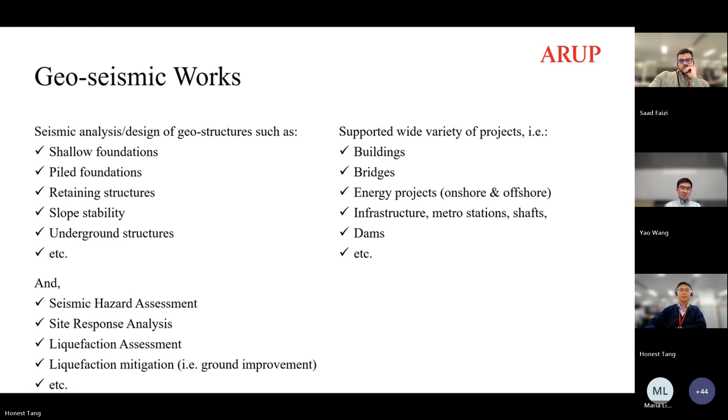For the design, we need to follow or meet the requirements stated in the design guidelines. In Asia, some regions have their own standard, like Japan, Indonesia, and the Philippines. They have their own design guidelines and requirements, especially to satisfy regional practice and concerns. For regions without local design guidelines for seismic design, most of them follow international design guidelines like ASCE from the USA or Eurocode.

But in Hong Kong now, we do not have a seismic code. As Maria mentioned, ARUP is working with the Hong Kong government to draft Hong Kong's first seismic design guideline. The process is still undergoing, and hopefully we can get it done so we can have a more comprehensive design for Hong Kong structures and other engineering designs.

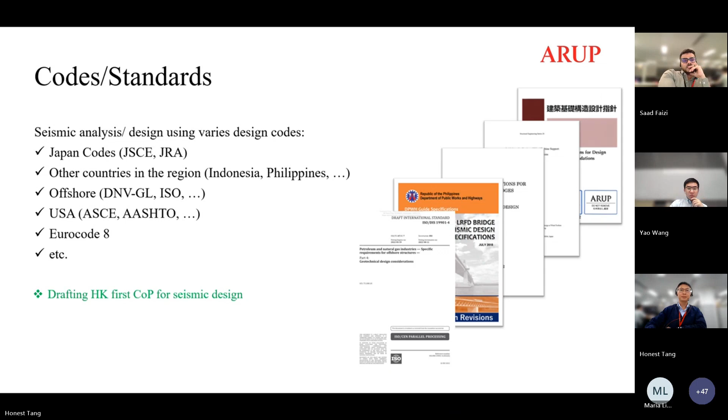Before doing the seismic design, we need to check the seismic hazard. This is an experiment we did recently - we did the PSHA, probabilistic seismic hazard assessment, for one of the projects in Japan, and also Korea, as well as the Philippines. So this is an example. Through this study, we try to work out a more regional-specific seismic background spectrum.

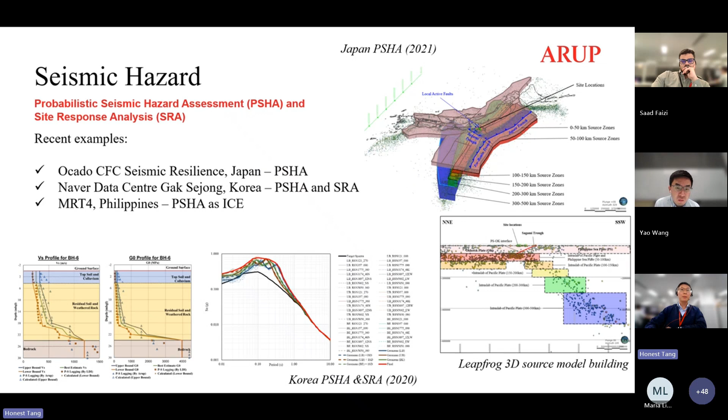Energy, especially offshore wind, is an emerging business or market in the past few years. I'm involved in a couple of them, covering Hong Kong and South Korea. Currently, most of them are from Japan because the government is pushing renewable energy quite hard - they put a lot of effort into this business or market.

So this is maybe an old map - you can see the dots, the blue dots showing the offshore wind site locations. I believe now along the Japanese shoreline there are already lots of projects there.

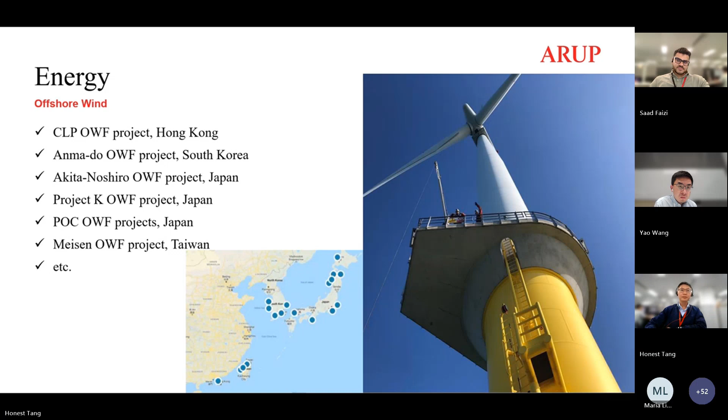So what we do for our offshore wind project - we focus on the foundation design, which we can split into two parts. First, we need to do the seismic hazard assessment. As I mentioned earlier, we need to carry out the liquefaction assessment to identify any liquefaction risk. After that, we need to do the site response analysis to check how the site responds under certain earthquakes.

Then we move to the foundation design. We need to do the dynamic soil structure interaction, the DSSI. We have two methods to do this. For preliminary studies, like the concept design stage, we normally use pseudostatic analysis to check the dynamic force. For detailed design, or when the client wants more accurate results or optimization design for their structure, we normally carry out time history analysis using advanced analytical software like LS-DYNA.

Here is some example to show you what they look like.

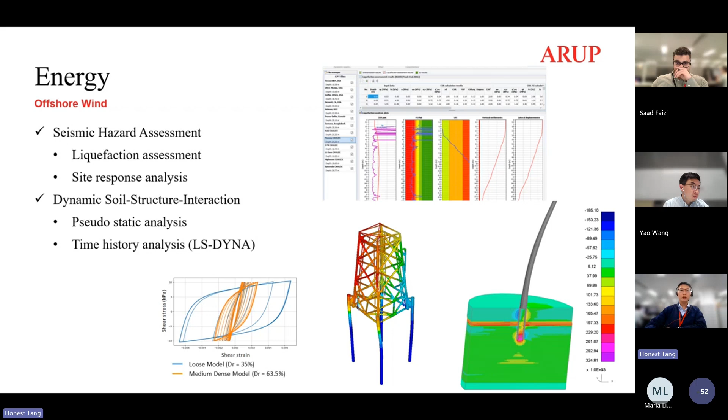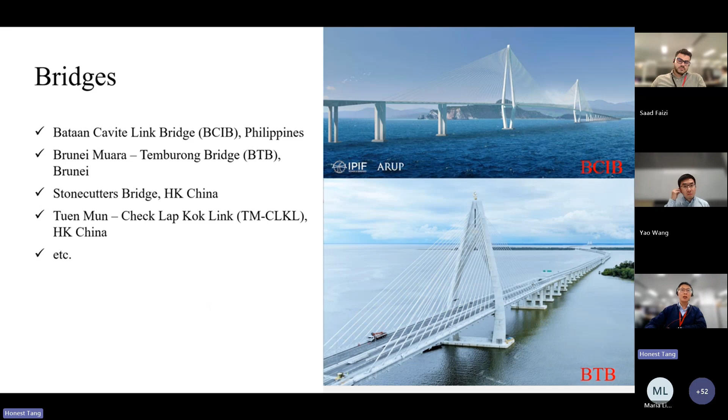Next, another major infrastructure project is building and bridge projects, covering different regions like the Philippines, Brunei, and also Hong Kong, China. We mainly focus on the foundation, similar to the offshore wind foundation - we also need to do the seismic hazard assessment as well as the DSSI to check the seismic impact to the structure.

The metro is also an important infrastructure, but it's slightly different because most of these metro stations are underground, so we need to do the dynamic soil load imposed on the underground structure. Regarding this kind of analysis, Saad will share his experience in more detail.

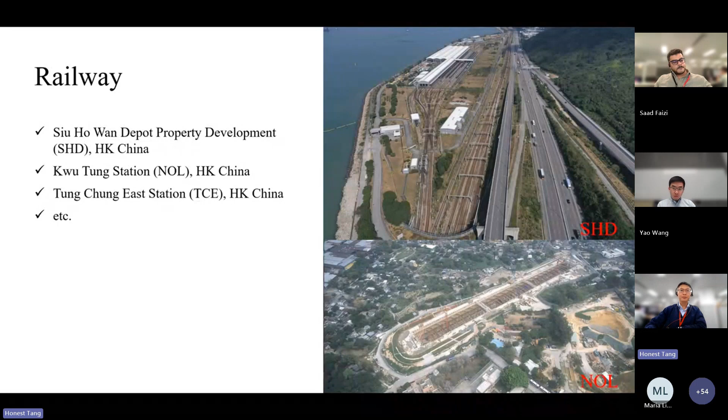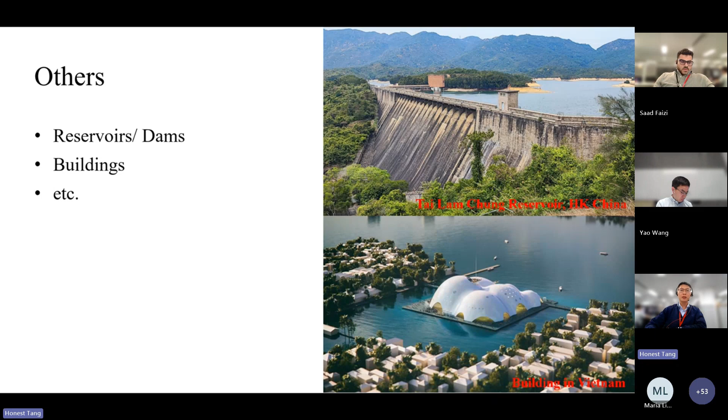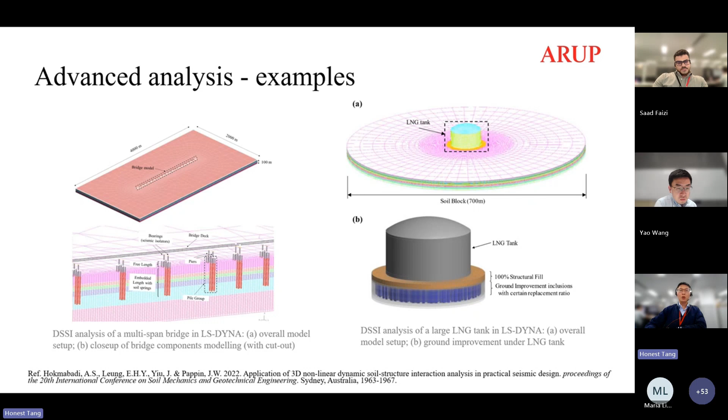We did this analysis using LS-DYNA. On the right-hand side, here is the LNG tank simulation to see the impact from the earthquake to the structure. We model the entire LNG tank and input the time history at the base to check it.

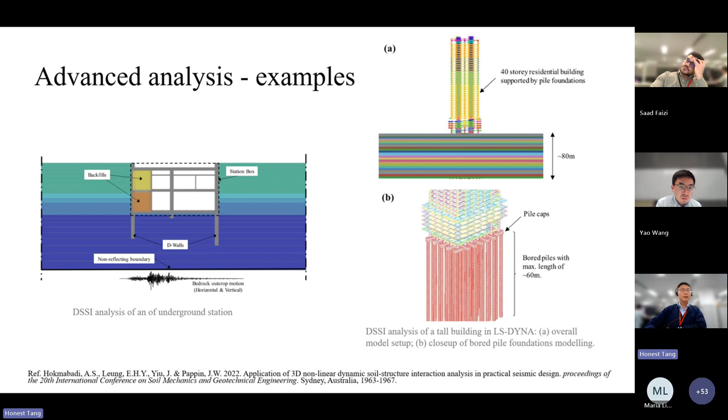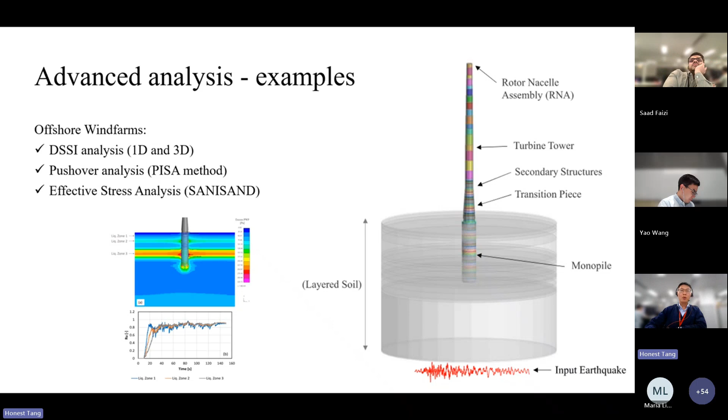So once instability happens, like liquefaction, the entire structure will collapse or overturn. That's a very high risk. So to precisely estimate the liquefaction potential, in the model we used an advanced soil model called SANISAND to check the pore water buildup and also the liquefaction risk.

Eventually, or luckily, all the measured vibration was within the limit. So the project went through well.

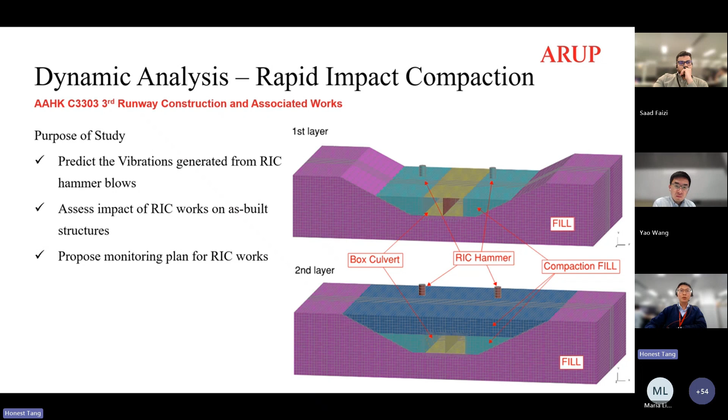So that's the end of my sharing, and I will pass the stage to Saad to share his experience.

Saad, please. Yeah, thank you so much, Honest. Quite insightful, quite interesting. Let me just quickly share my screen. Okay, you can see my screen now?

Yep. Okay, so hi everyone, my name is Saad Faizi. I'm a geotechnical engineer in Hong Kong. I'm actually sitting just besides Honest.

I currently sit in the geotechnics and energy team in ARUP Hong Kong, and I work mainly on offshore wind farms these days, handling both the foundation design and subsea cable installation for various wind farms in East Asia. But in addition to those offshore projects, I also work with the Hong Kong geo-seismic team on the seismic analysis and design for a diverse range of projects in different parts of the East Asia region.

So for my sharing in today's webinar, I thought it would be interesting to share one of our studies involving the seismic analysis of an underground station using two distinct and well-known numerical approaches, namely the pseudostatic and dynamic time history approaches. And I think Honest touched upon it in one of his slides briefly as well.

Let me just quickly take out my laser pointer. Okay, so this is a quick rundown of what we will discuss in this sharing. I'll try to be brief, and I'll try to stay within my time limit.

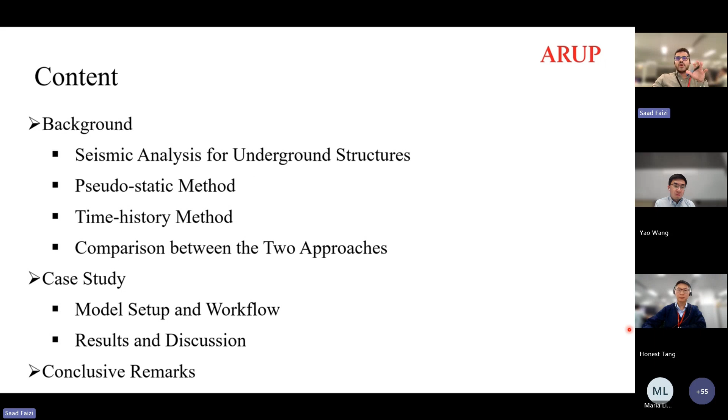So in case I'm running out of time, I might actually skim through a few of the results, but rest assured, you can find the details in one of our papers, and I'll talk more about it.

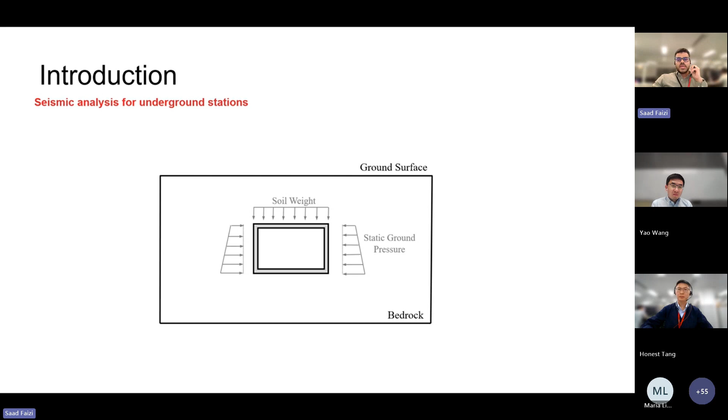So let's first begin with a quick introduction and get ourselves up to speed with the seismic analysis for underground structures. Typically, this is what you would see - the loads that you would expect acting on an underground structure like this underground box structure. But when we consider the action of an earthquake, you can expect that there would be seismic impact, right?

And the seismic behavior of underground structures, understandably, is quite different from your above-ground structures. And that's primarily because of the fact that you can imagine the underground structures are constrained by the ground itself, so they're not allowed to vibrate freely.

The other reason could be that the geometry itself is such that you would expect the length to be much longer than the cross-section dimension. So there are key distinct differences in terms of how we assess the seismic behavior of an underground structure.

For most of these underground structures, the inertia of the surrounding soil is quite large compared to the inertia of the structure itself. And thus, the seismic design of the underground structure focuses mainly on the deformation of the ground and its interaction with the structure itself.

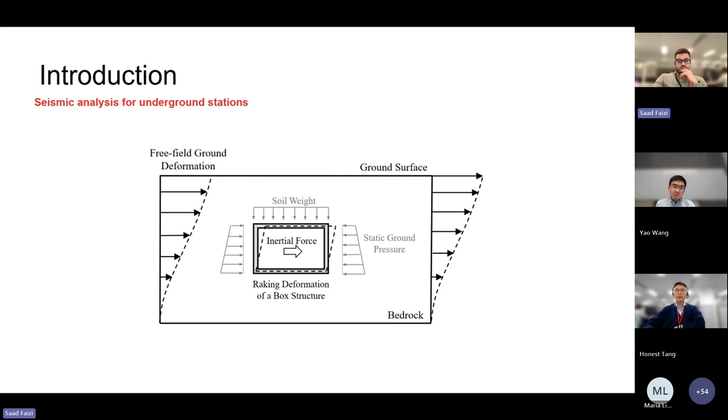So this is just to give you an idea of different geometries, because we know that tunnels could be circular or box shaped, and they have different seismic characteristics. The box shaped structures on the right are expected to go through racking deformation under seismic loading, and are not seen to transmit loads as efficiently as a circular lining, which undergoes ovaling.

But if we stop for a moment and talk about the impact of earthquakes on underground structures, past records indicate that underground facilities have experienced a lower rate of damage. But recent studies and experiences from projects reveal that underground structures can potentially suffer significant damage during large earthquake events. So undertaking a proper seismic analysis for these structures is quite crucial.

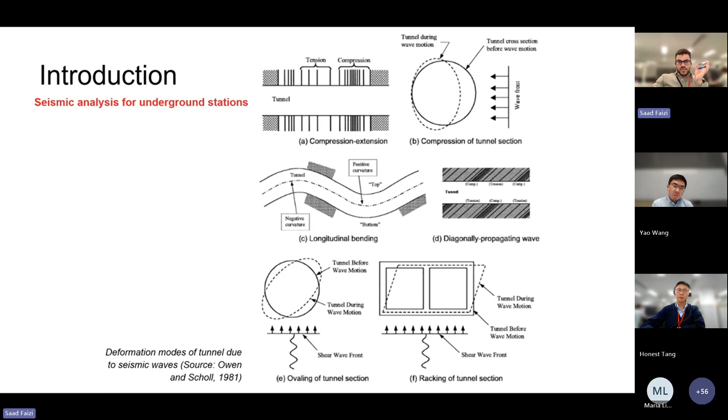I would present two of the widely popular approaches. The first is the deformation-based pseudostatic finite element method, which is a simplified approach deemed to be a very convenient way that is widely applied in research and design practices. In this pseudostatic method, we make use of the horizontal free field ground deformation, derived from the site-specific site response analysis, and apply it to the boundaries of the finite element or finite difference model. You then see the forces and deformation induced in the underground structure itself. I'll talk more about its procedure in later slides.

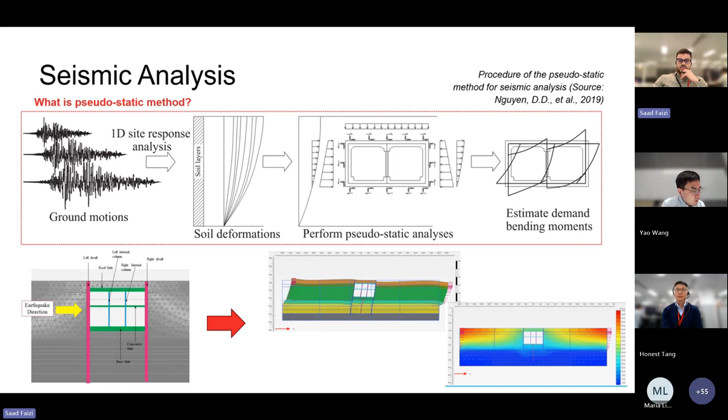The other approach is the dynamic time history analysis, which Honest touched upon in quite a few of his slides. Over here you can see some snippets from a few of our projects. The dynamic time history analysis is regarded as more sophisticated yet more complex. In this advanced nonlinear finite element approach, everything is modeled explicitly, and the simulation is run in the time domain. One shows the box structure and the other shows an offshore wind turbine with monopile, done using ARUP's finite element program called LS-DYNA, an explicit dynamic code that runs in the time domain and is able to incorporate both structural and soil nonlinearity.

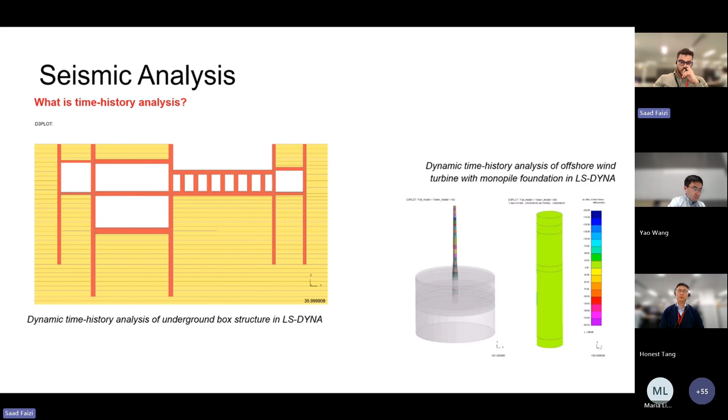Since both are well-established approaches, we wanted to understand how they compare in terms of applicability. I did a high level comparison of the two methods on various aspects. The pseudostatic method offers a very convenient and simplistic way to evaluate the effects of seismic ground motion. But the question is whether the simplistic method is in fact sufficient or accurate enough. There are certain limitations with pseudostatic approaches, for instance when we talk about the inertia of the structure itself.

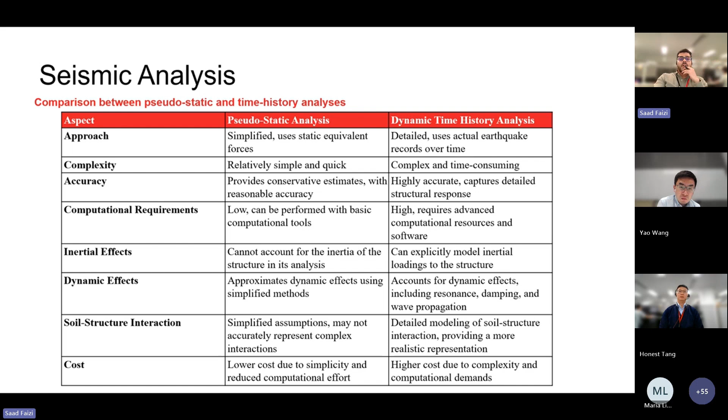So to fully understand and assess those two methods, we wanted to do a side by side comparison of the two approaches, using an actual project case, which formed the basis of this study. We took this comparative study using an actual project of an underground station in East Asia. It's worth acknowledging that this case study is a joint effort by our team of current and former ARUP colleagues. We presented these study findings at the World Conference on Earthquake Engineering last year, and for further details and specifics of the study and results, I'd encourage you to give this paper a read.

Let's quickly look at the specifics. I'm going to go over some key design characteristics, first and foremost the geometry of the structure itself. What you're looking at is an underground station structure, a typical cross-section illustrating the configuration of the station. The station is approximately 400 meters long and has two track levels, constructed by the top-down method, consisting of two lines of diaphragm walls. Internally there is a barrette pile wall that supports the two primary slab levels, along with some internal slabs and walls that allow it to line up with the railway line. This results in some unused volume because of these internal walls and slabs, which we had to backfill with mass concrete to counteract the buoyancy of the structure.

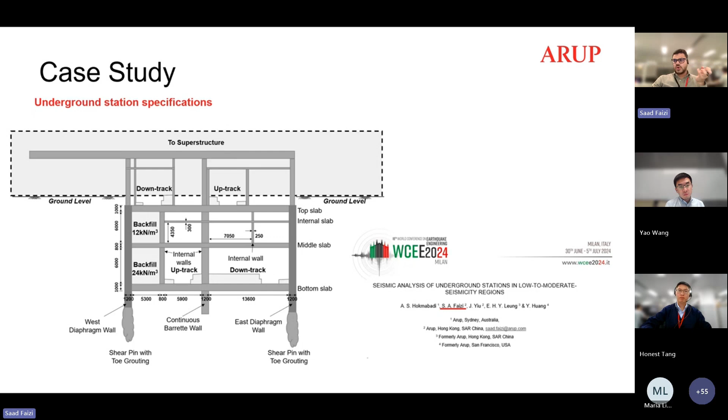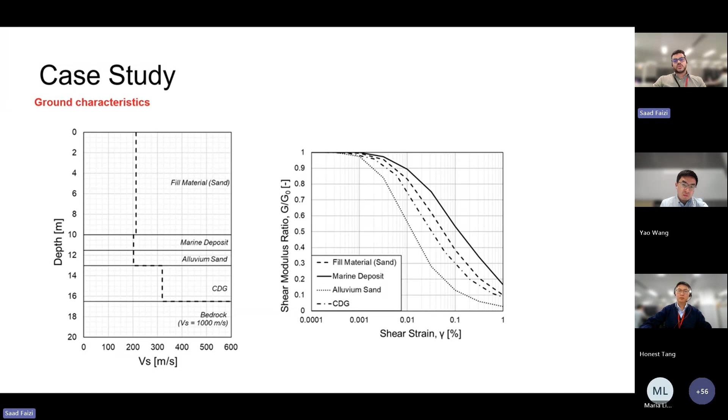If we talk about the design earthquake motion itself, the project site is actually located in a region of low to moderate seismicity. The characteristics of the design earthquake were determined based on a site-specific probabilistic seismic hazard assessment, PSHA. Here you can see the uniform hazard response spectrum at bedrock for a 1,000-year return period.

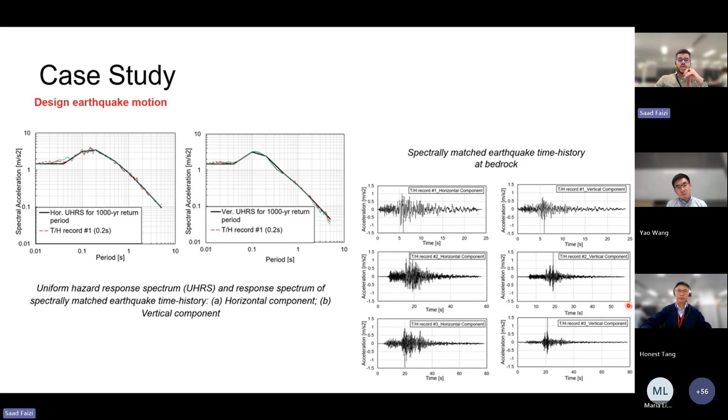Now, if we look at the time history records, they were selected from a database of real ground motion with magnitude and distance combinations that contributed most significantly to the hazard at the site. We did some spectral matching to modify the selected time histories so that they match the uniform hazard response spectrum of the site. You can see those spectrally matched time histories on your right. So these are some of the key inputs for the analyses we're going to talk about now.

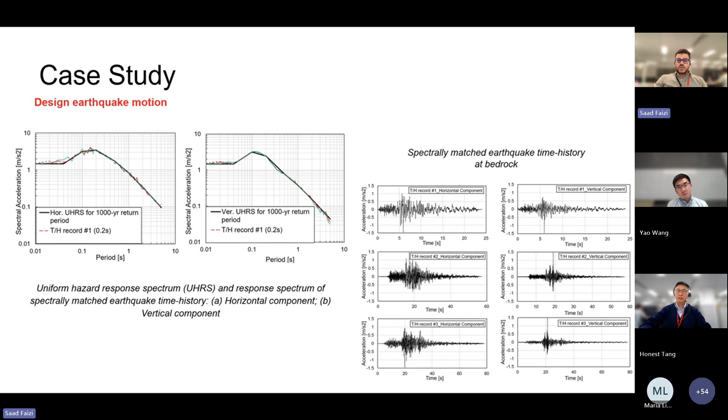Let's look into those two modeling approaches we were talking about. The first one you see here is the pseudostatic site analysis, pseudostatic method. In order to start with the pseudostatic method, you first need to get your ground deformation profile.

In order to do so, you need to do a site-specific site response analysis. This was first done to estimate the maximum lateral ground profile under the design earthquake motions. We use our finite difference software called Oasis Siren, which allows us to analyze the response of a one-dimensional soil column subjected to an earthquake motion at its base.

In the site response analysis, the earthquake motion was modeled as vertically propagating shear waves, while a series of horizontal layers were specified for the soil column, with each layer modeled as a non-linear material with hysteretic damping, and the soil damping derived as a function of the defined soil modulus degradation curves.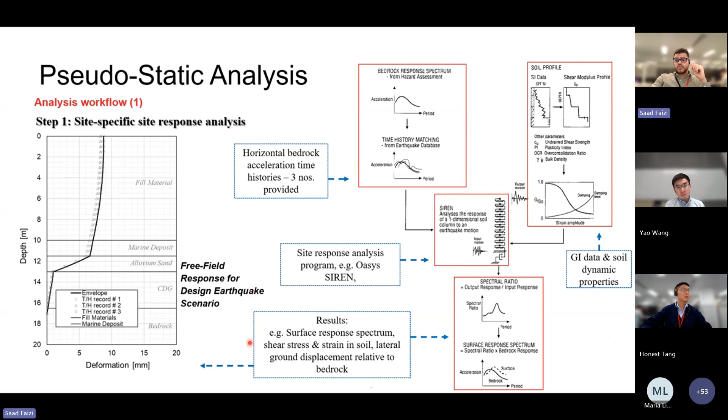Once the ground profile was determined, we moved to the next steps, carrying out the pseudostatic soil interaction analysis by applying the maximum free field displacement profile to each side boundary of the finite element model, together with imposing a pseudostatic horizontal acceleration to the whole model, so that we can get a free field lateral displacement profile that's uniform across the entire soil mass.

We then also had to compute the strain compatible stiffness values, based on the degradation curves, so that they correspond well to the shear strain of the free field site response analysis for the pseudostatic approach.

Once we've done that, we move to step 3, applying the same free field condition, boundary condition, and horizontal acceleration to the combined model of the soil mass and the tunnel structure. This underground structure is considered as a wished-in-place structure and is subject to the imposed seismic loads from these deforming soil profiles.

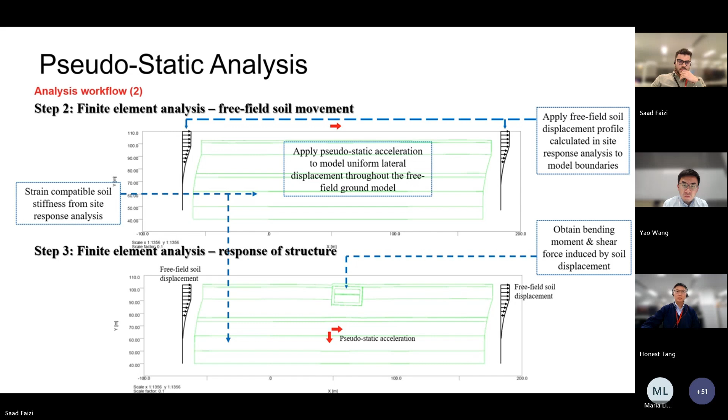Here you see some snippets of our Plaxis 2D finite element model that was carried out to do the pseudostatic soil interaction analysis on the station box structure.

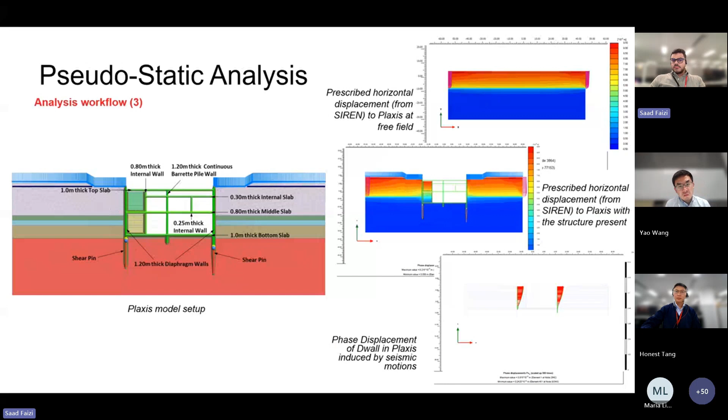Let's jump into the other time history analysis. This is another model you may have seen in Honest's slide, a snippet from our LS-DYNA model for time history analysis. As stated before, for this method the simulation is run in the time domain, and that allows us to accurately understand the seismic response and interaction of the soil with the structure under the earthquake motion.

Some key pointers regarding the time history analysis, for your reference. In terms of the model dimensions, we kept those sufficiently large to ensure that the free field condition is close to the edge of the model. The ground motion time history records were applied at the model base as a biaxial earthquake excitation in the horizontal and vertical directions. We had non-reflecting boundary conditions defined at the base of the model.

The structural elements you see here were all modeled as elastic elements. Finally, regarding the soil modeling itself, we had to model the soil non-linearity properly.

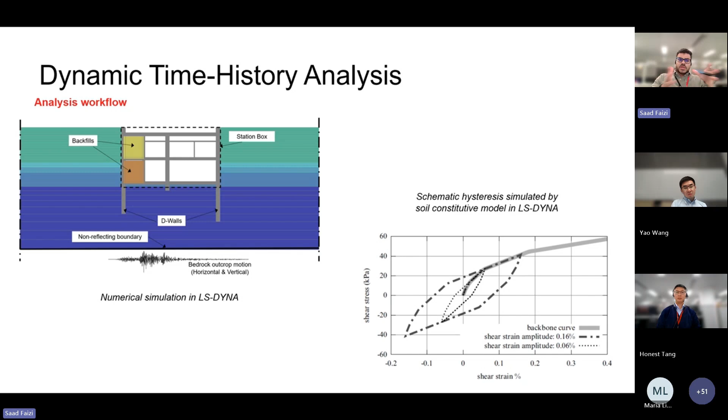We used the soil degradation curves for each of those soil types, and made use of the hysteretic soil constitutive model that helps us capture the hysteresis in each soil under cyclic loading. Here you can see that simulated hysteresis. It helps us capture the hysteresis of the soil under cyclic loading, where the energy dissipation under the cyclic response can be modeled explicitly and automatically as the area enclosed by the shear strain response hysteresis loop. So these were some of the key considerations for the dynamic time history analysis.

So in terms of the results and discussion, we wanted to focus on three aspects of the study. One was to study it under the design earthquake itself. We then wanted to see what happens if we have a very severe form of earthquake, so we considered an increased earthquake motion, basically 2 times the design earthquake. And the third was to study the response with respect to the mass concrete fill that we have.

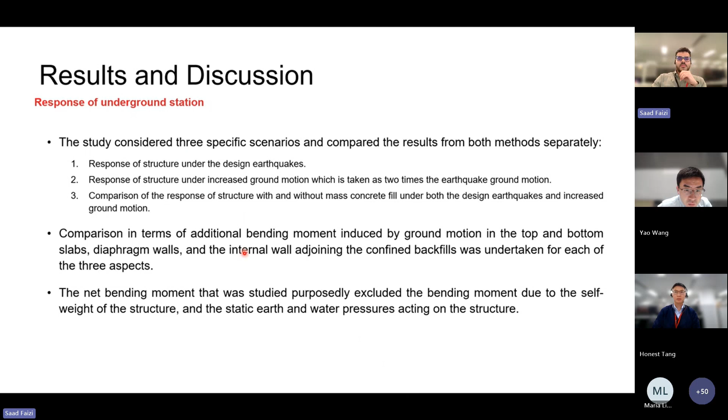We did this by comparing the additional bending moment induced by the ground motion for the slabs in the different walls. I'm just going to skim through those results in the interest of time, but if you're interested, I would encourage you to read the paper for detailed results and discussions.

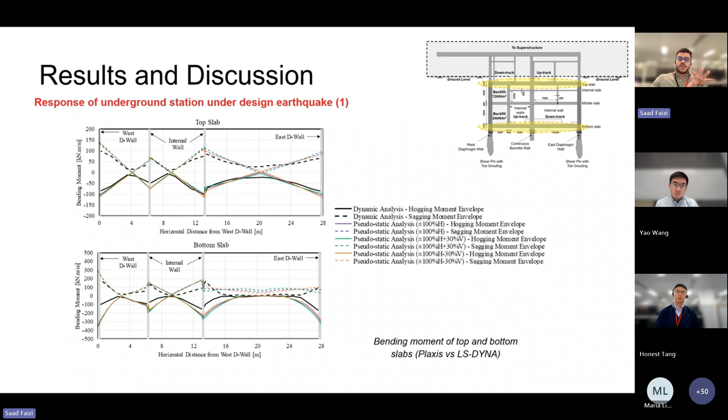This over here you see are the bending moment profiles of the two slabs, the lower and top slabs. And the additional bending moment induced here, for the design earthquake, were quite comparable and found to match reasonably well when we do both pseudostatic and dynamic time history side by side, with some higher values for the pseudostatic, which is understandable because we expect it to be more conservative than the time history.

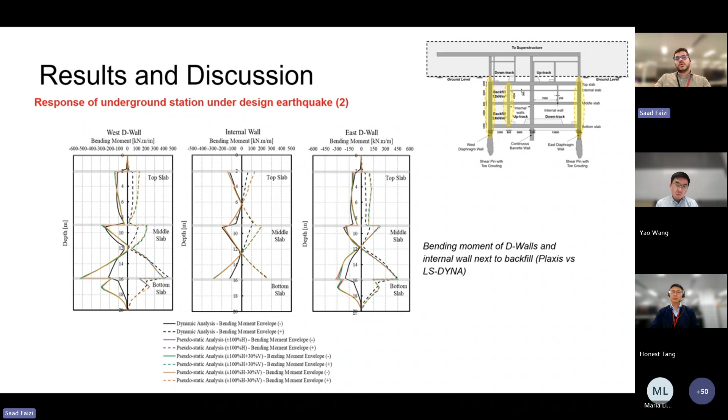We saw similar results with regards to the wall bending moment profiles as well, and this led to a fair conclusion that for a design earthquake, for low to moderate sort of design earthquake, the pseudostatic analysis is performing quite well as compared to the dynamic time history analysis.

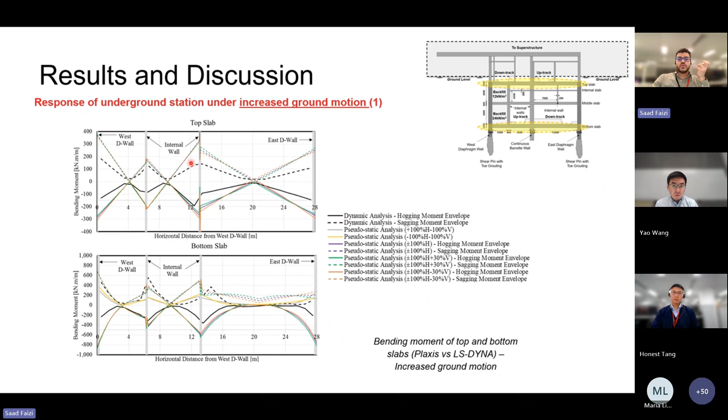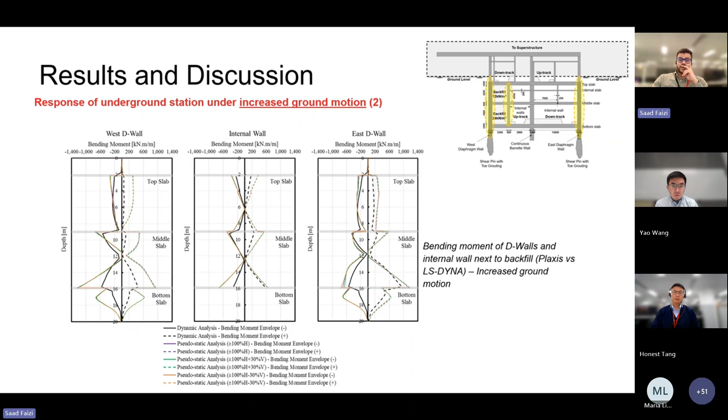However, the interesting bit came when we started looking into the increased ground motion, because that's where we could see that the pseudostatic analysis tends to overestimate the bending moments. The difference was more evident for the top slab under the increased ground motion. Similarly, for higher ground motion cases, we also saw a similar thing for the diaphragm walls and the internal walls as well. So this was an interesting finding.

Lastly, with regards to the concrete fill, this was interesting because we entered the study with a presumption that the backfill would lead to more inertial mass, and therefore the pseudostatic may not perform that well. But what we noticed for the design earthquake is that it did perform reasonably well, and it led to understanding how much the inertia of the structure itself would be relevant when we consider both of these two analyses.

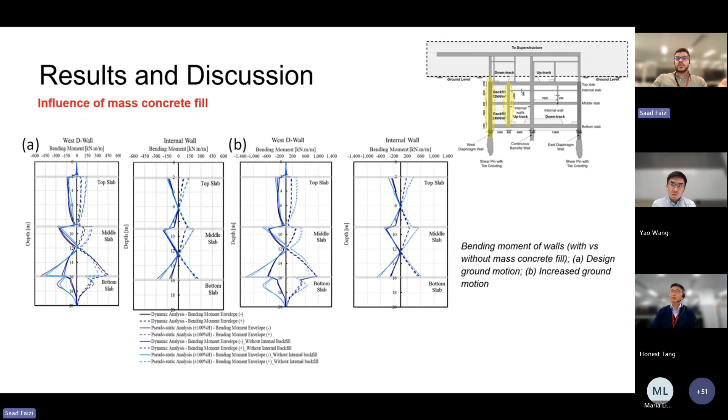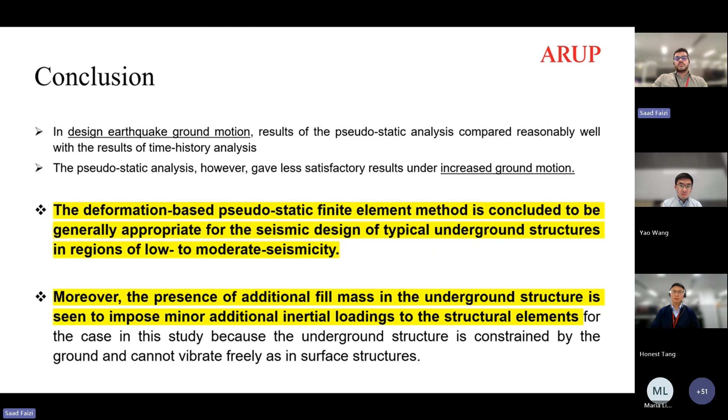So as a conclusion, what we ended up concluding in this study was that the deformation-based pseudostatic finite element is considered generally appropriate. For the presence of fill, there was imposed minor additional inertial loadings. But when it comes to the increased ground motion, that's where we saw some quite good discrepancies. So yeah, that was my bit.

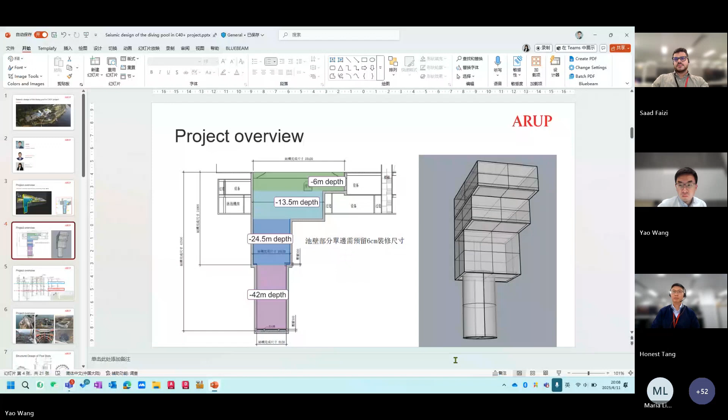So I'll pass it over to, maybe I'll stop sharing my screen. I'll pass it over to Yao. Thank you, sir. Let me quickly share my screen. Okay, so can you see my screen? It's okay, yes, yes. I'll just start.

Hello everyone, I'm honored to be invited to this sharing session, and my topic is seismic analysis of deep diving pool. I hope to make a last-minute adjustment to my presentation material, because for the seismic part, we use exactly the same two methods in this project, the pseudostatic method and time history method. Saad has already made a clear explanation about the principles, so I'll just skip this part and mainly focus on the case study.

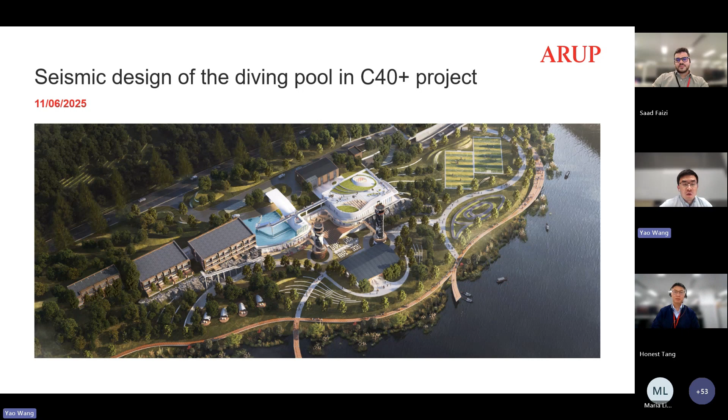First, a quick introduction about myself and the project team. I'm Wang Yao, a geotechnical engineer from ARUP Shanghai office, and I'm one of the project participants who will walk you through this case study. We also have Wang Mingming, our project engineer, and Liu Shuyi, our structural engineer, joining us online.

So we are discussing a deep underground diving pool project in Hangzhou, China. ARUP was responsible for the structural and geotechnical design, including the preliminary structural design and the excavation support system.

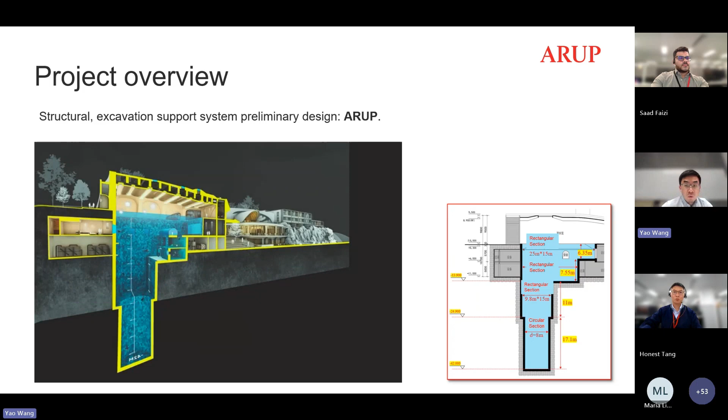The pool is quite deep, reaching 42 meters underground. Its shape changes with depth. The upper sections are various rectangular shapes of different sizes, while the lower part is circular.

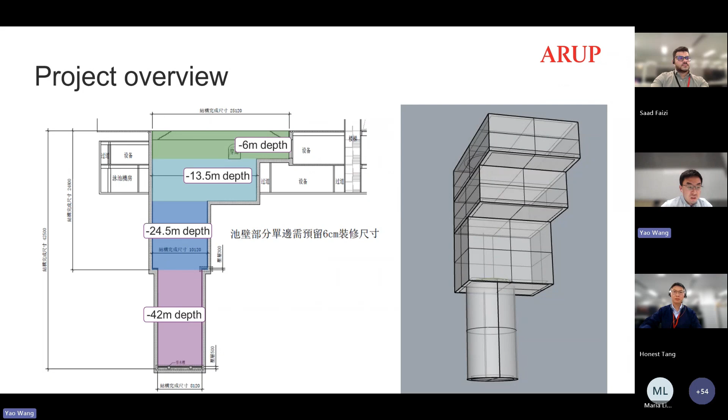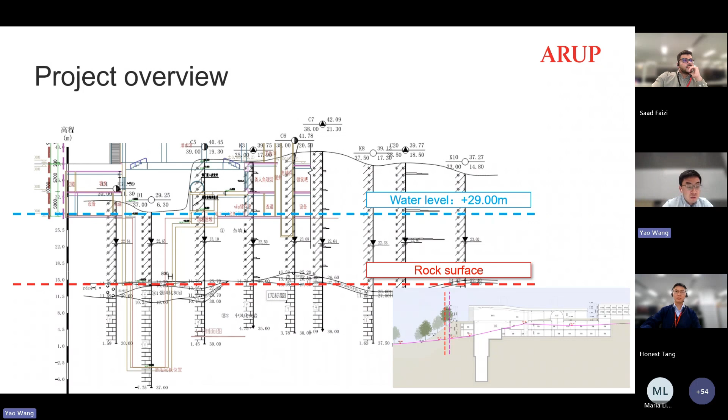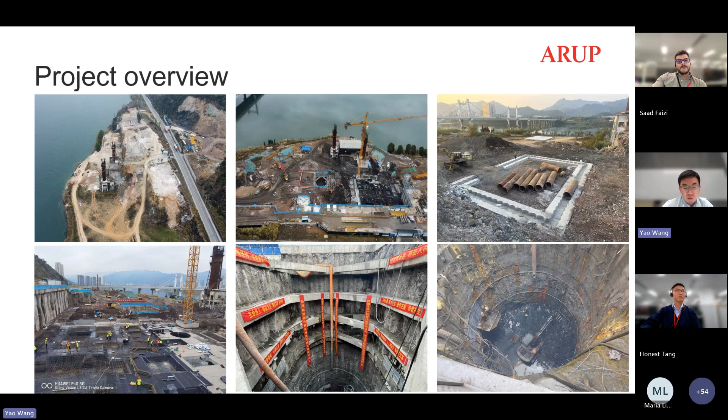Right now the project is almost completed. Here are some construction photos, especially the two on the bottom right, which show the excavation of the foundation pit. Actually, it really looks like a mine shaft, I think.

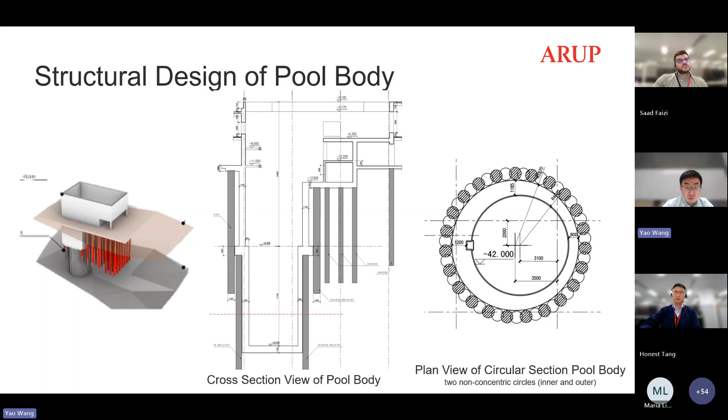While a complete circular section is ideal structurally, the architecture team needed a notch in the inner side of the wall for pipe work. This means the inner wall wasn't a perfect circle. Our solution was to design the pool wall using two non-concentric circles for the inner and outer wall. This allowed us to largely benefit from the circular shape's advantages while minimizing material use.

For the design, we also used multiple software packages to cross-verify our calculations. The first is called YJK, a common Chinese structural finite element analysis software. It handled the overall static and seismic design. The software is simple and efficient, however it uses simplified assumptions, especially for seismic actions, meaning we needed more precise verification.

So we used a second software called LS-Dyna, a more powerful finite element analysis tool. We used it for detailed analysis of high-level earthquake actions to get more comprehensive and accurate results. I'll explain this part later. Besides that, we used Plaxis 3D, a geotechnical finite element analysis software, for designing the excavation support system.

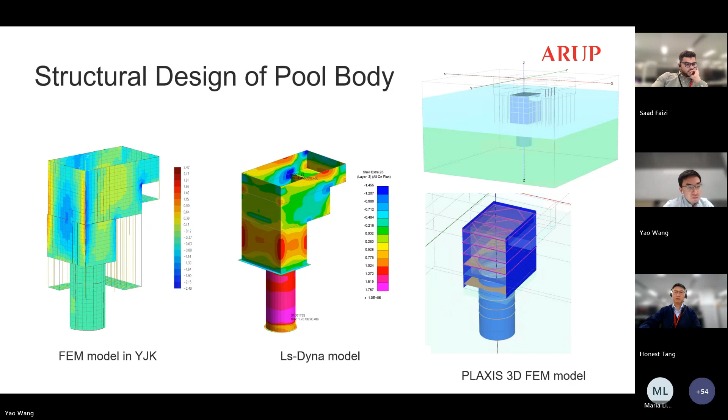Designing an underground diving pool is more intricate than typical buildings, I would say. For static loads, we had to consider both scenarios, like the pool fully filled with water and completely emptied. Plus, the pool experiences external earth pressure and water pressure. In extreme cases, we were dealing with a 300 kilopascal water pressure differential between the inside and outside of the pool.

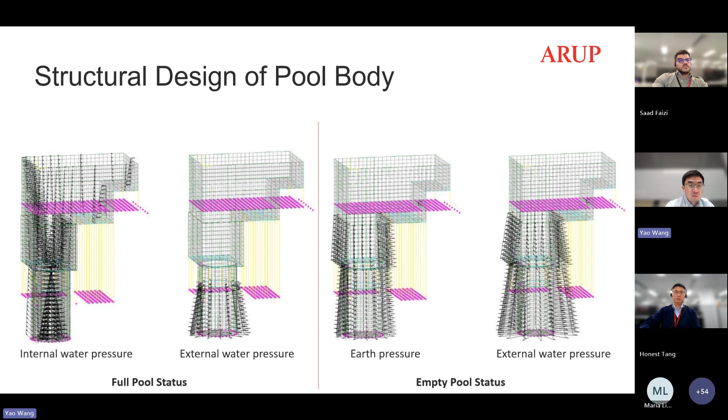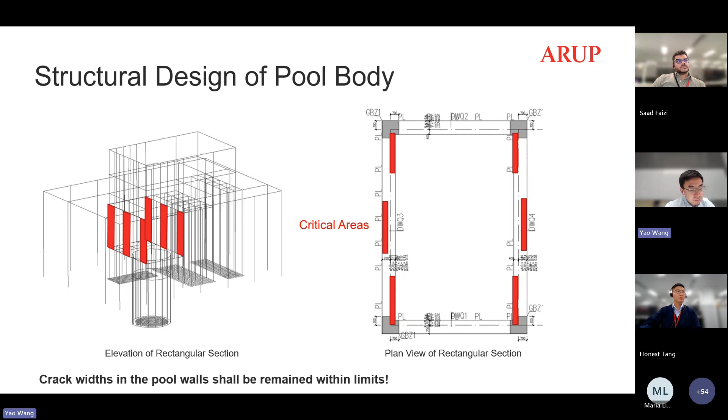So when the pool is fully filled with water, the rectangular sections of the sidewalls were the most critical areas, as shown in the highlighted area of the figure. We had to ensure crack widths in the pool walls remained within limits. For the circular section, when full, the notch area was the most critical point, and no cracks were allowed there.

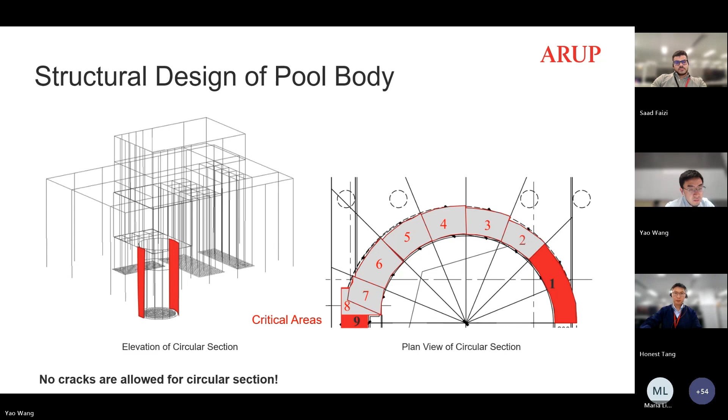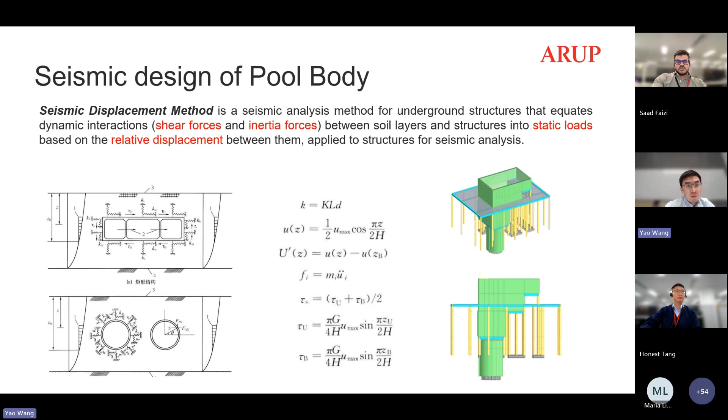So let's move to seismic analysis. As I said, we used the pseudo-static method and time history method, but here we call it the seismic displacement method. I think it's just one of the pseudo-static methods, just under a different name. In one word, this method is a seismic analysis method for underground structures that converts the dynamic interaction—meaning shear forces and inertial forces between soil layer and structures—into static loads based on the relative displacements between them. So in this method, the input parameters are shear forces, inertial forces, and dynamic water pressure.

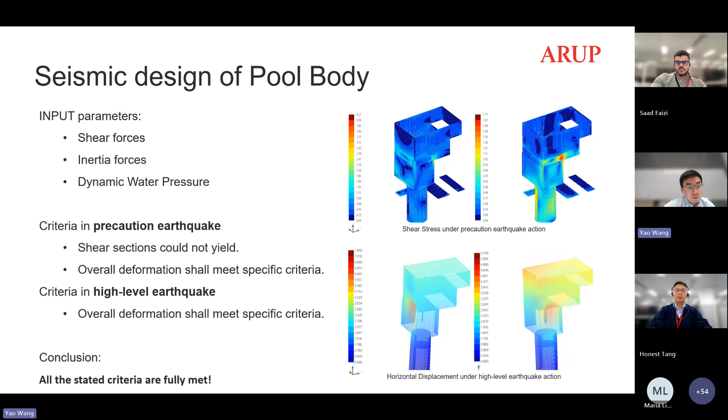This figure shows the software. It calculates bending moment and shear force results, and requirements indicate the pool stays elastic during low-level earthquakes. For precaution-level and high-level earthquakes, the shear sections could not yield, and overall deformation had to meet specific criteria. Our calculations confirm these requirements were met.

However, as I mentioned before, the seismic displacement method is simplified. Its reliability in the design process needed further validation. Also, the critical behavior at the soil-rock interface during an earthquake required close scrutiny. So we performed a time history analysis during our study to verify our earlier findings.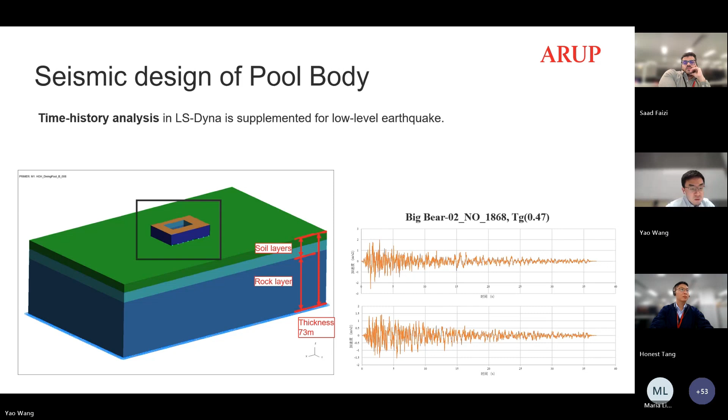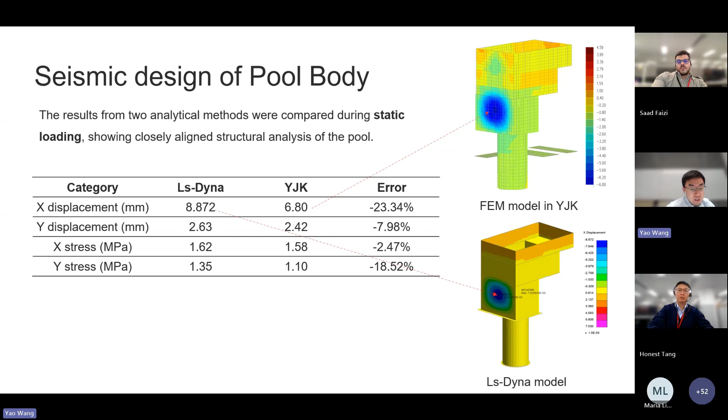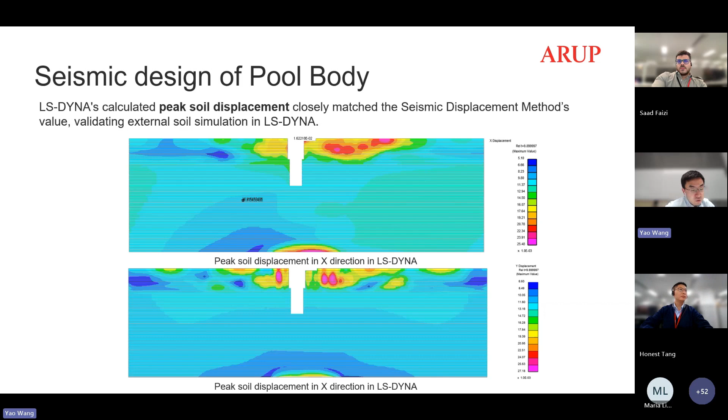First, we compared static results for both the YJK model and the LS-Dyna model. Despite the apparent magnitude of error, we think the absolute displacements are relatively close, confirming our pool model's accuracy. Then for seismic results, LS-Dyna's calculated peak soil displacement closely matched the seismic displacement method results, validating our external soil modeling. For the low-level earthquake actions, we extracted and analyzed the stress results for both the pool concrete and reinforcement.

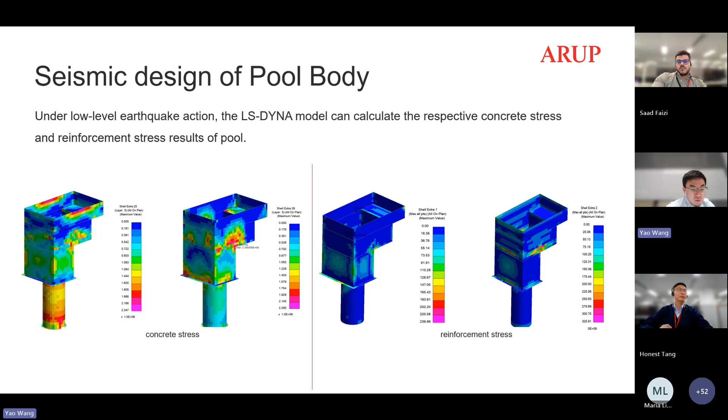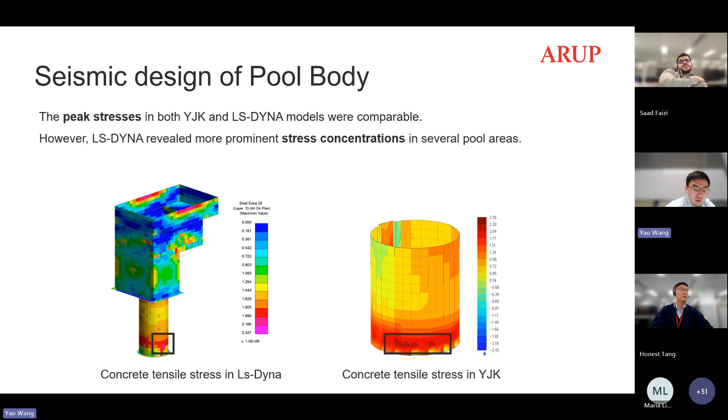The peak stresses in both YJK and LS-DYNA models were comparable, showing that the seismic displacement method can indeed be used for basic seismic analysis in this diving pool project. However, LS-DYNA revealed more prominent stress concentrations in several pool areas, indicating its higher calculation precision compared to the seismic displacement method. So let's go to the conclusion.

To summarize: first, designing an underground diving pool is more complex than standard structures, demanding consideration of intricate load conditions and stricter design requirements.

For seismic analysis, the Chinese seismic displacement method is suitable for basic analysis for this project, providing correct but less precise results. Time history analysis in LS-DYNA offers more accurate results, but requires building more complex models and providing extensive input parameters. Actually, we basically spent more than half our time adjusting our parameters.

Due to its location in an area with low seismic intensity, the pool designed for static conditions can fundamentally meet requirements for earthquake-resistant behavior. I think that's all I have shared with you. Thank you.